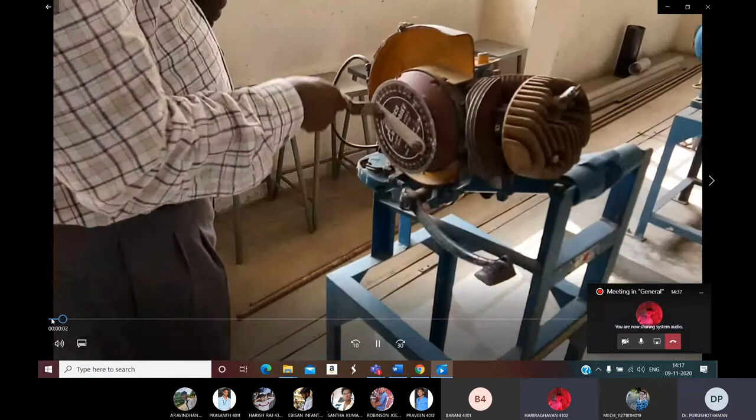Yes sir. 2 stroke engine, petrol engine. When you rotate, the piston will move up and down. Within 2 strokes, we are going to complete 1 power stroke. So the piston is moved from, okay, this is the top dead center. Piston is coming from top to bottom. The 2 processes will be completed.

Again, it will be moved from bottom to top. We'll be completing another two processes. The main processes are expansion and compression. The two processes will overlap. I will draw the diagram and explain how the two-stroke engine works. Already we have studied it in Thermal Engineering 1. Similarly, you have to fix the top dead point and bottom dead point, and then the port opening.

Port, sir, this port.

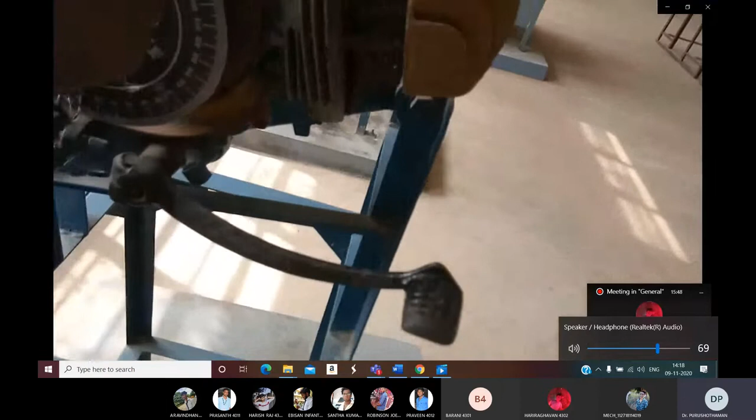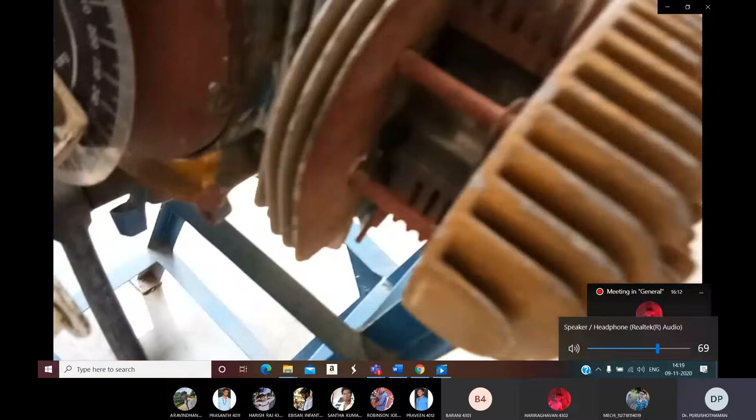So this is the suction port, this is the exhaust port. Suction port, transfer port and exhaust port. Through the transfer port, the air-fuel mixture, which we initially charge inside the crankcase, will be transferred.

Through the transfer port, the combustion takes place through the spark plug, and before reaching the bottom dead center, the exhaust port will open, allowing the exhaust outside. So this is the exhaust port. It will come out.

Here, transfer port. So it's connecting the crankcase to the combustion chamber. So this is let out the fuel. Now I will stop the video and explain it. Hariraghavan. Yes, sir. I will stop the video and explain how to take the readings.

This is the scale which is fixed on the flywheel. When you rotate, we can fix the top dead center and bottom dead center, and we have to keep rotating from top to bottom. As the piston comes from top to bottom, the suction port will close. You have to mark the corresponding reference point first, then move the piston down, and the exhaust port will open near the bottom dead center.

After some time the transfer port will open. That also you have to mark at the corresponding reference point. So during top to bottom, we mark 3 points: suction port close, exhaust port open and transfer port open in one stroke. Again, the piston will move from bottom to top. You have to mark another 3 points. First, the transfer port, and you have to mark here.

Again, after some time, within 10 to 15 degrees, the exhaust port will close; that we have to mark. Then we move the piston continuously from bottom to top, and before top dead center, the suction port will open. You have to mark these 6 points, take the corresponding sector length and calculate the angle between suction port open and close, exhaust port open and close, and transfer port open and close.

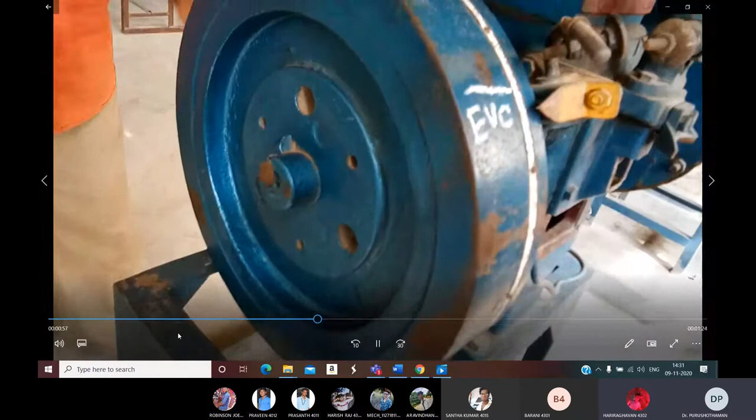Are you able to see? No, sir. Sorry, I will share once again. Okay. Yes, sir. Okay. Audio வருது இல்லையா? Otherwise I will explain it. Okay, sir.

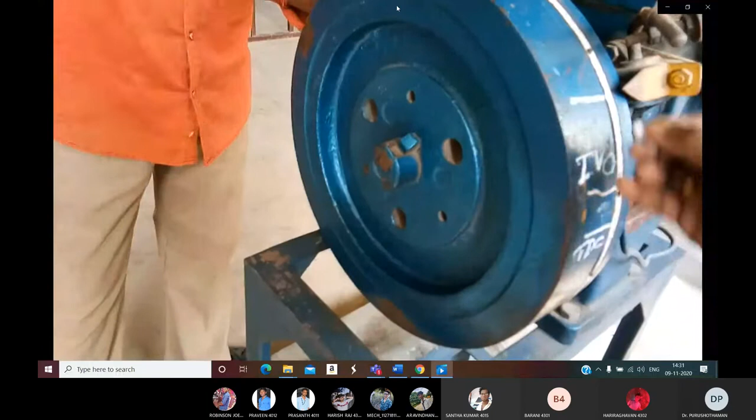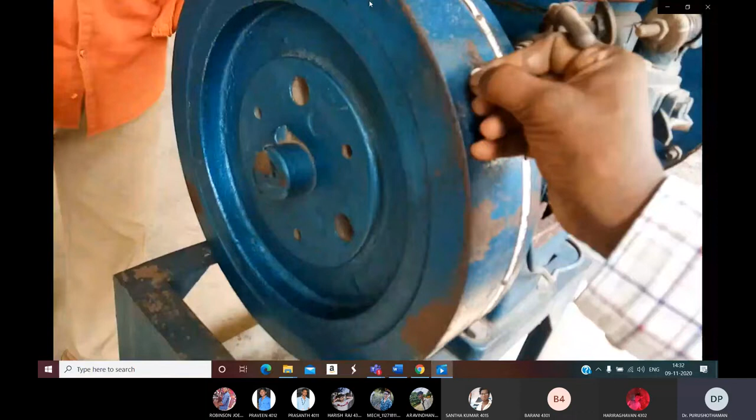So this is the flywheel. You have to move the piston up and down. You have to mark all the required data. So this is a four-stroke engine. We can find out the valve timing diagram, because the four-stroke engine is provided with valves. There are two valves, inlet valve and exhaust valve. I am marking the exhaust valve opening time and inlet valve closing, and this is where the spark ignition will start. So I will draw the diagram and explain it. This is the experimental setup.

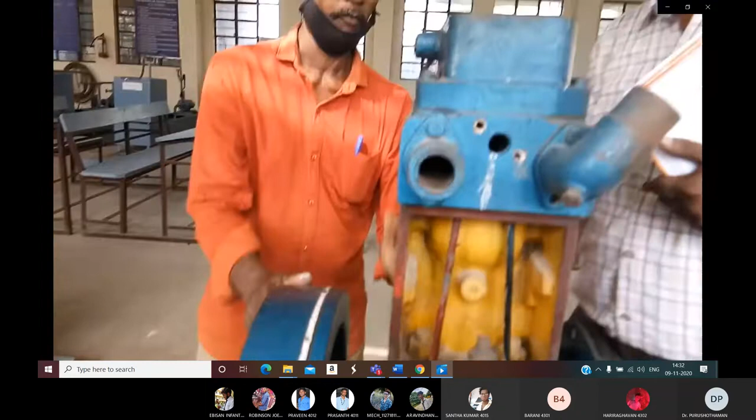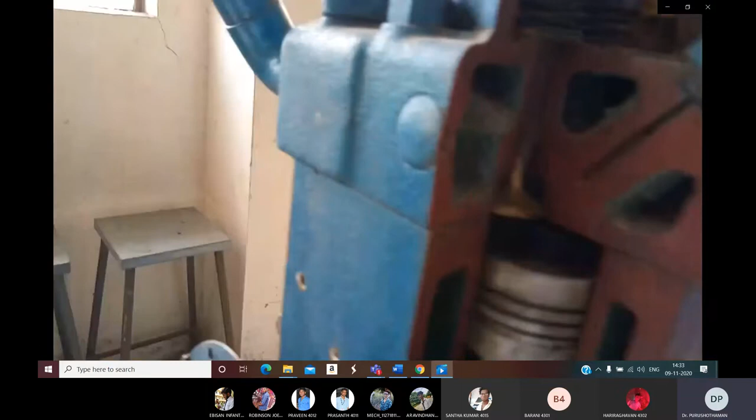So you have to move the piston in the up and down directions. You have to fix the top dead center and bottom dead center, and slowly you have to move the piston and mark when the valve opens and closes. That is the main purpose of this. Depending upon the valve opening time, how much suction takes place, and how much time is required for discharging the exhaust gas. This is the main purpose of this experiment.

Okay, right now I'm going to share the whiteboard and I'll draw the valve timing diagram. Okay, sir. Please check the recording is going on. Yes, sir. It's going on, sir.

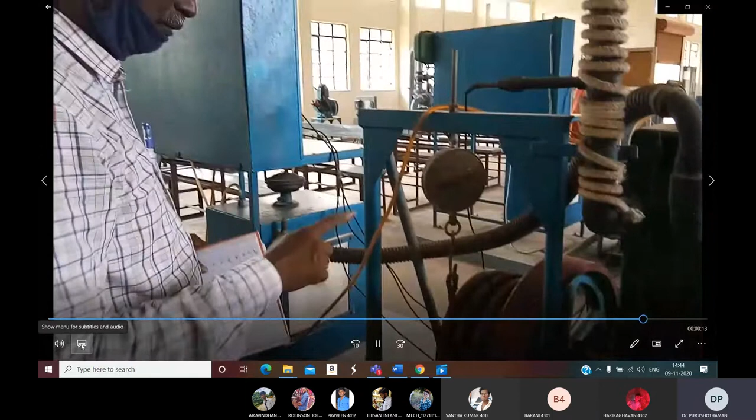Anyway, right? So now, with help of this, I'll explain. Just I am recording. So this is the exhaust.

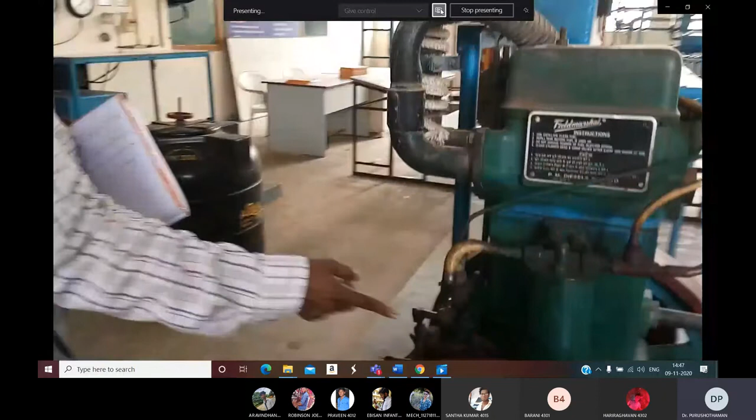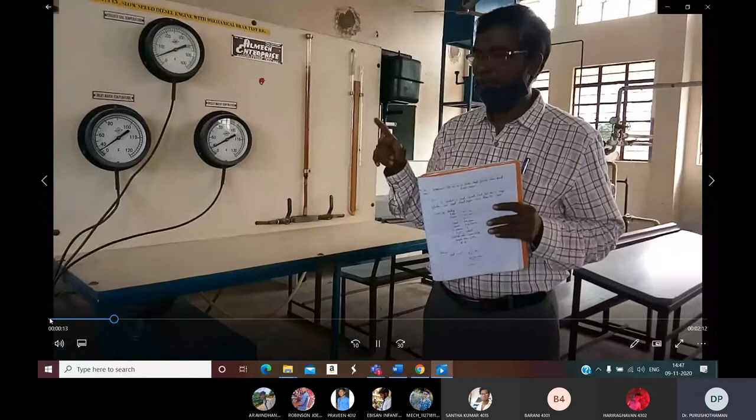This is the load we want to apply. For a single cylinder four-stroke diesel engine, we are going to conduct the performance test. Various efficiencies and specific fuel consumption we are going to calculate. Finally we draw the performance curves versus brake power: thermal efficiency, indicated thermal efficiency, mechanical efficiency, and specific fuel consumption. And we find the brake power of this engine.

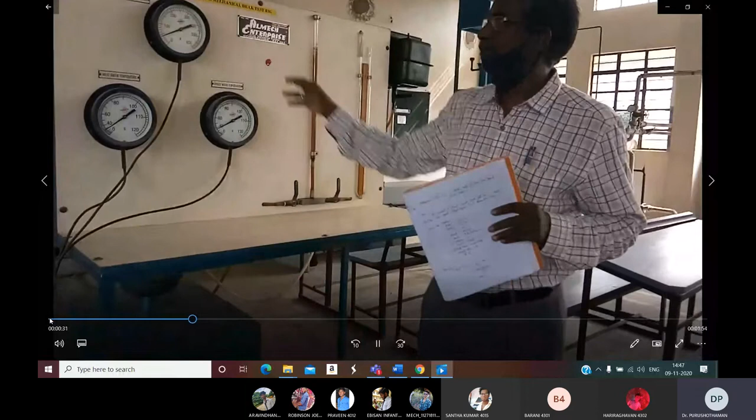So this is the panel board. Again we are going to measure the exhaust gas temperature, inlet water temperature and outlet water temperature. We have to measure the flow of the diesel. Just open it, allowing the diesel from the tank through the burette. The diesel will be going up.

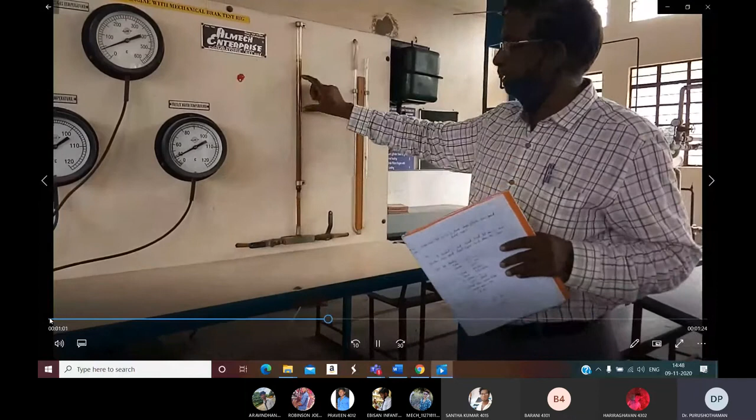Just to take this, we have to close the valve and measure again 5 to 10 cc of fuel and take the time taken, and then we have to record it in the observations, and then you have to open it. Like this, you have to take. These are the main readings.

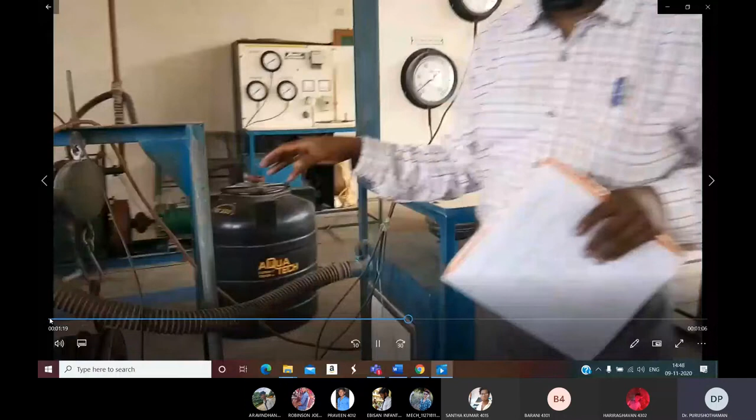Again, we want to measure the flow of air. You have to use these manometers and take this head difference, and using the formula, find out what is the mass of air. This is the diesel engine, single cylinder engine. Okay, this is the cylinder. So this is the water inlet, this is the water outlet.

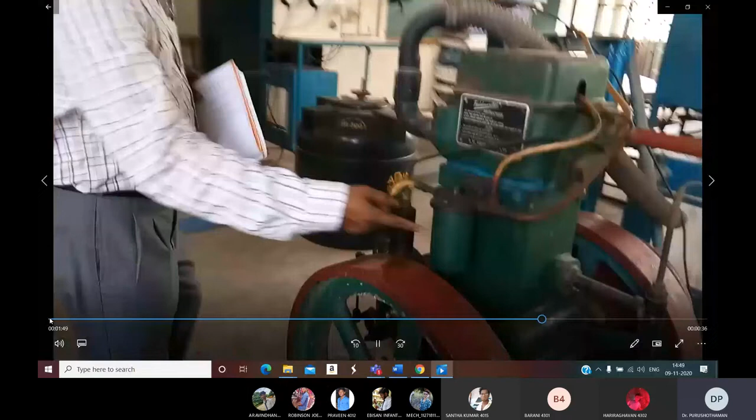So this is a mechanical loading device. It's called a rope brake dynamometer. Initially you have to start the engine without load, and then you have to apply load with the help of the loading device. This is called the flywheel. This is the flywheel. This is the fuel filter, and then these are the fuel injectors. Okay, fuel injectors, and then this is the load we want to apply.

For this, this is the 5 kg load, and you have to apply it like that. You have to take all the readings, and then you have to increase the load by another 5 kg, and like that you have to keep on taking 5 to 6 readings, and then you have to plot the curve. So each and every load from no load to full load you have to apply, and you have to draw the performance lines. Yeah, so the calculation we are going to explain in the observation columns. Thank you.

Okay, so now I am going to share the whiteboard and what readings we are going to take. Okay, otherwise I will share the tabular column of record, right? I will share the... are you clear? Okay, sir.

Is it shared? No, sir. No, sir. Just... sorry. Now tell me, is it shared? Yes, sir. Okay, I will show the tabular column. Okay.